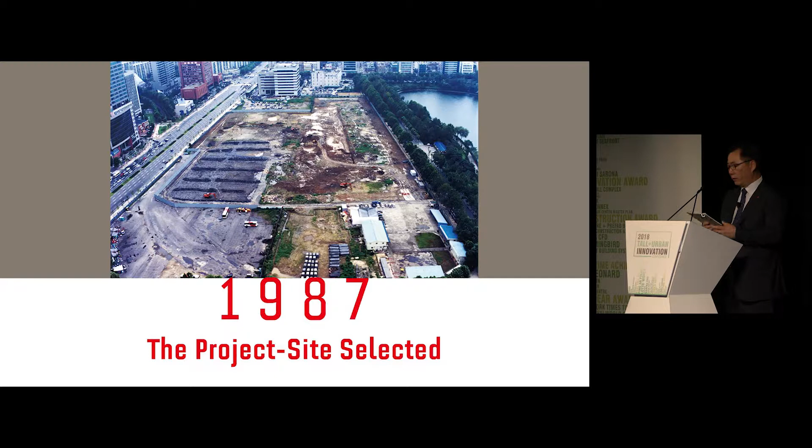We put a lot of thought and imagination into creating the complete version of Lotte Tower over a long time. 20 years after project planning, construction began in 2011 with the placement of the super large mat foundation.

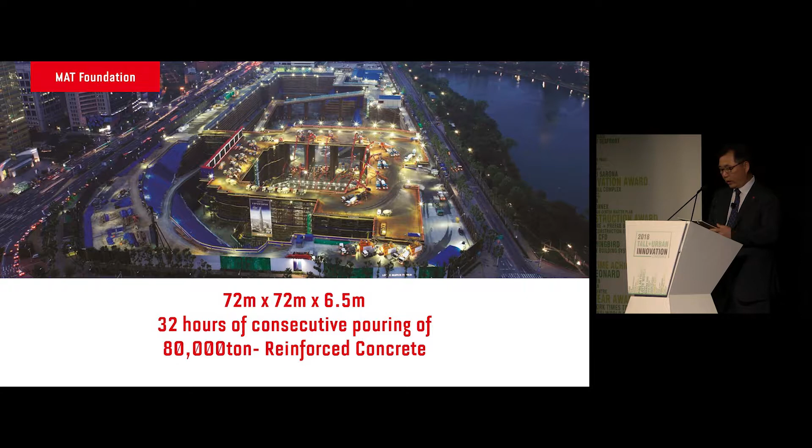As the first super tall building in Korea, there were so many obstacles that we needed to overcome. In spite of so many hardships, the completion of Lotte Tower was possible thanks to the capabilities and passion of Lotte Group.

Since the establishment of Lotte Confectionery in 1967, Lotte Group has led various fields including retail, hotel service, chemical, and construction, enriching people's lives by providing superior products and services that customers love and trust.

Lotte has also made inroads into around 30 countries in the world, including Asia and Europe, and achieved a total revenue of $90 billion last year as a result of active businesses, proving its status as Korea's Big Five.

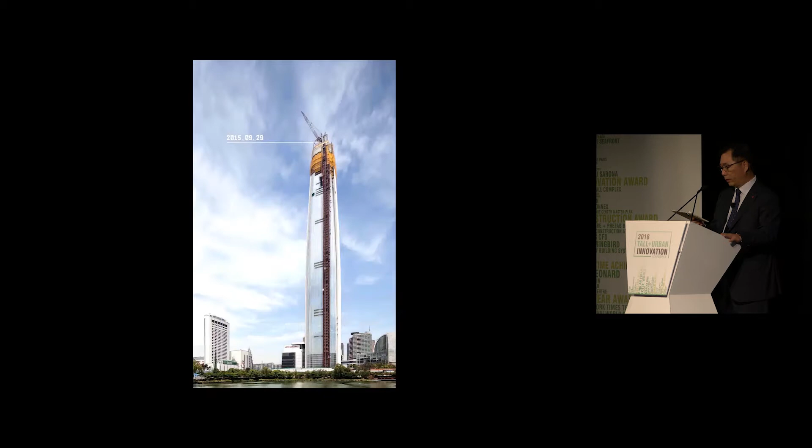Lotte Group has accumulated its core competencies and global business know-how from different business sectors over the past 50 years. The result of integrating those over 30 years is the birth of Lotte World Tower.

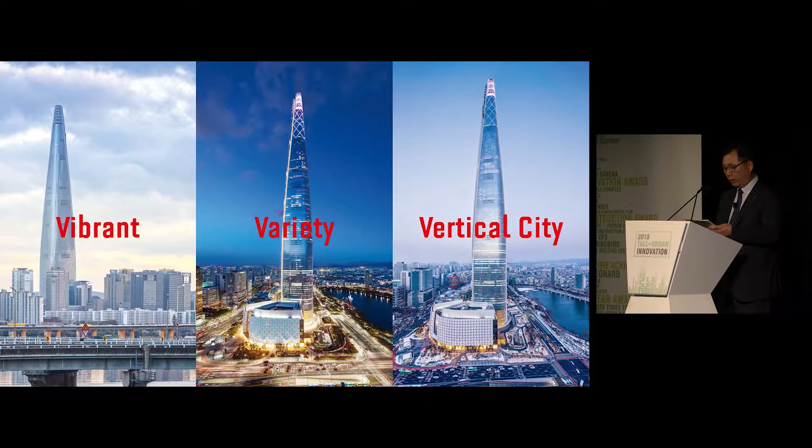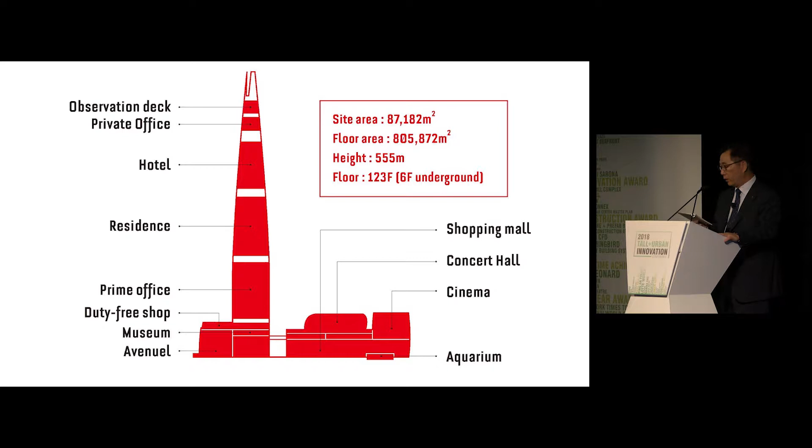I mentioned the Lotte Tower earlier as a vertical city that offers a comprehensive lifestyle. Lotte Tower is designed to perform various functions so it can give varied memories to those who experience the tower. It is a comprehensive space that offers not only shopping, but also entertainment, food and drinks, and high-quality cultural facilities all together.

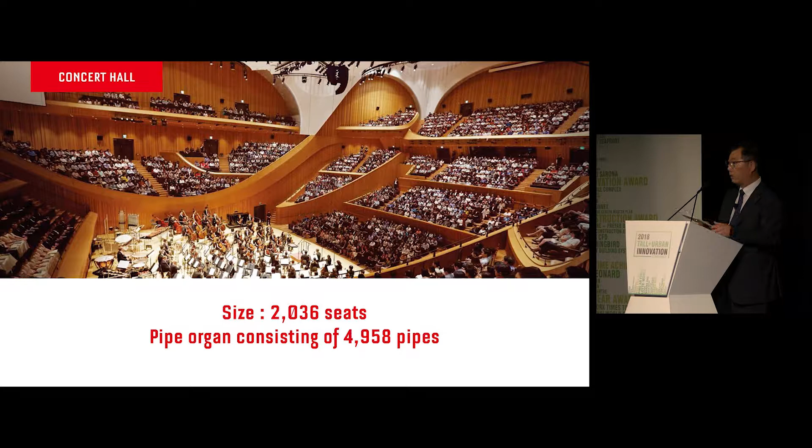The glassed floor observation deck and the double-deck elevator won 3 Guinness records with the height, travel distance, and speed. Lotte Tower's residence proposes a premium living style in the sky. It also has Signiel Seoul, a top-class hotel, Lotte Duty Free, the biggest duty-free shop representing Asia, Avenuel, the largest luxury department store in Korea, and the aquarium, the sea in a city.

One of our missions is to provide various experiences so that visitors can live with their own memories. Lotte Tower is also wide open for new product showcases of companies, or collaboration and marketing with global corporations.

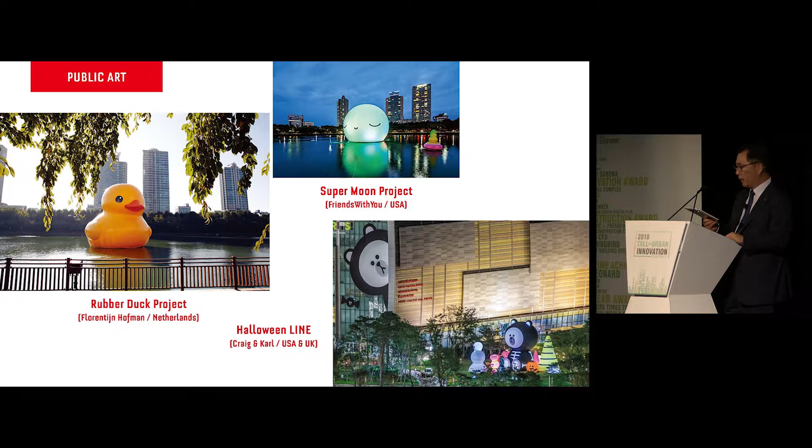Skyline by International Skylining Federation and tall climbing by world champion Jain Kim are presenting unforgettable and touching moments to people around the world. At the Lotte Tower, visitors can also easily enjoy inspirational artworks such as Possibilities and the Diver. Seokchon Lake, connected to the tower, organized various public art projects including Rubber Duck and Supermoon.

Rather than seeing the tower as just a building, we try to identify it within the relationship with the local community. As a result, we had to consider traffic and environment issues altogether. We established an underground pedestrian road that connects Lotte Tower to promote convenience for public transportation. One of the features we take pride in is the fact that the tower itself is eco-friendly.

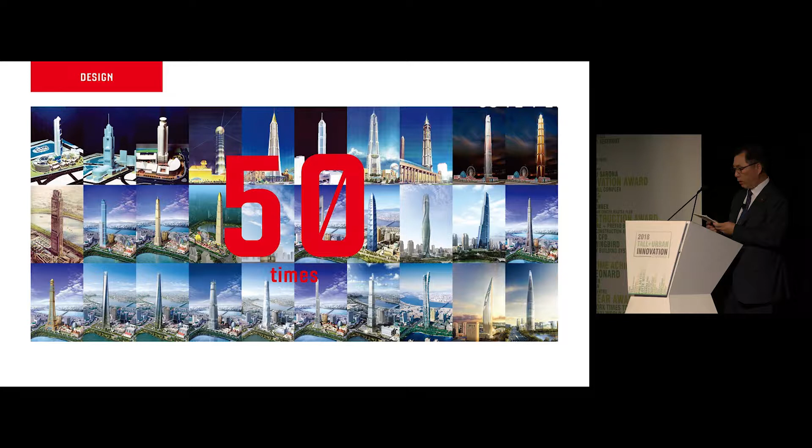Without explanation, you can imagine that Lotte Tower was created with the sweat and efforts of countless individuals. Its design concept was fine-tuned 50 times. To turn this concept into reality, 5 million people worked at high altitude quietly yet steadily, even on rainy and snowy days.

To appreciate the effort of everyone who contributed to building the tower and remember their hard work, we set up a wall of fame, engraving all workers' names at the tower's main gate plaza. Lotte Tower has now achieved 1 million cumulative visitors only 6 months after its grand opening.

As I have mentioned, we want Lotte Tower to become an open platform, both online and offline, that presents happy memories to everyone. There is a Korean saying that reads, seeing once is better than hearing 100 times. As the Lotte World Tower is now taking its first step, I'd like to invite you to the tower. We hope to communicate with the members of the council and enjoy mutual development together. Thank you.

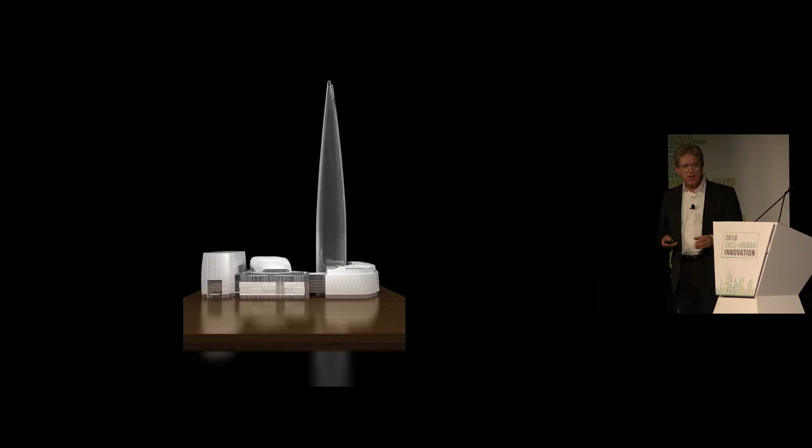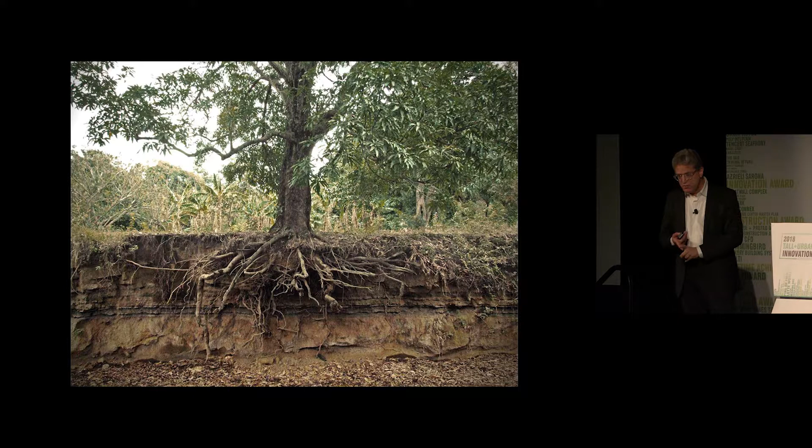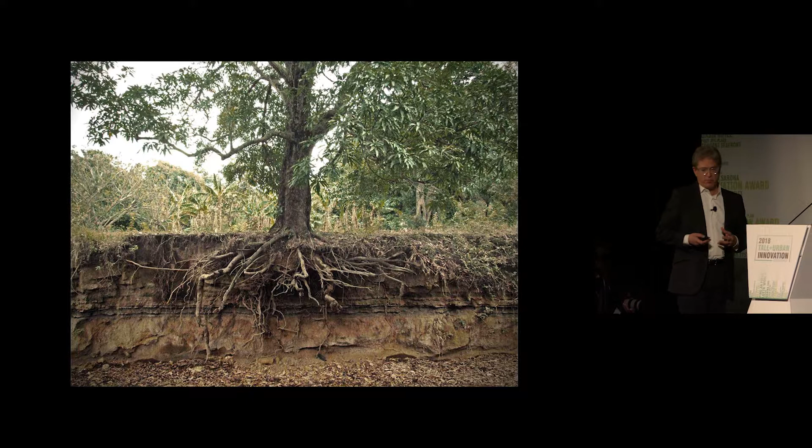But I want to talk about something broader than the height of the building, and that has to do with the multiplicity of uses, the fact that it is virtually a vertical city, and something of a city within a city. Like a tree which nourishes itself from the ground, there is connectivity to transportation systems, to a subway system, to a multimodal bus station connection, and to a strategy of urban design, which brings diverse function combinations into the upper areas, both in the base of the building and the tower. So this is not merely a matter of tower design.

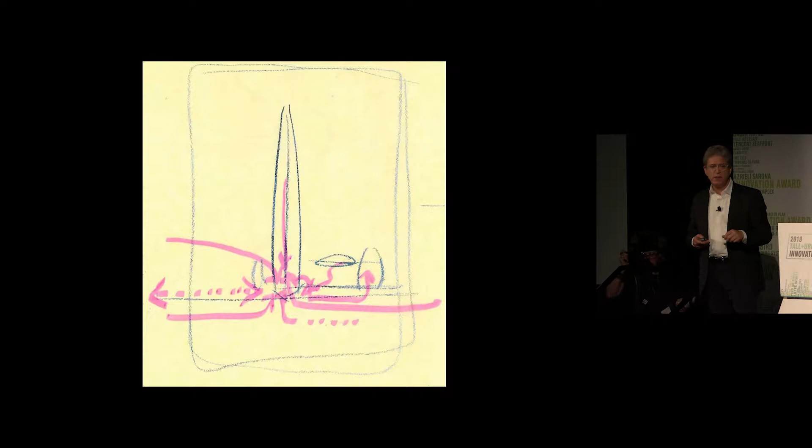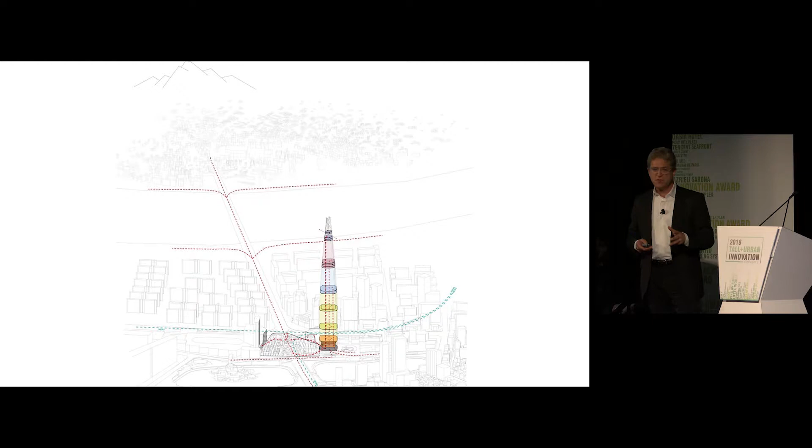The tower is about 3 million square feet, the base is another 2 million square feet, but they are all thought of together, both programmatically in terms of circulation and business sustainability, and also in terms of architectural design. So the tower itself has 7 or 8 different functions, including healthcare, retail below, but also office, residential, conferencing, hotel, and a kind of public entertainment at the top.

But that's only the tower, which you see here. The principle of the placement of the tower, and the reason for its existence, has to do with a city that is a series of sub-cities. Seoul is, as those of you who know it, vertiginously or vertically challenged, to the degree maybe only that Hong Kong and maybe Rio are.

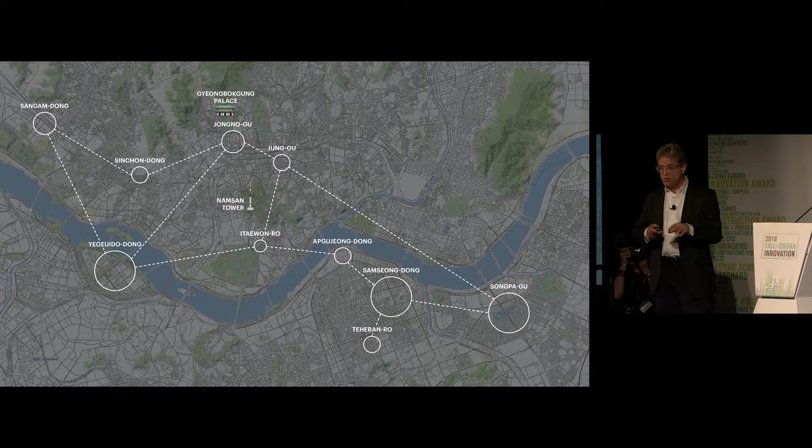So perforce, it's a series of sub-centers cradled within mountains, and this has created a series of different areas that correspond to each other by transport, but serve a little bit on their own as sub-centers. This theme of the multinodal city, which will be the theme around which the Council on Tall Buildings will gather in Dubai some months to come, is critical to this project.

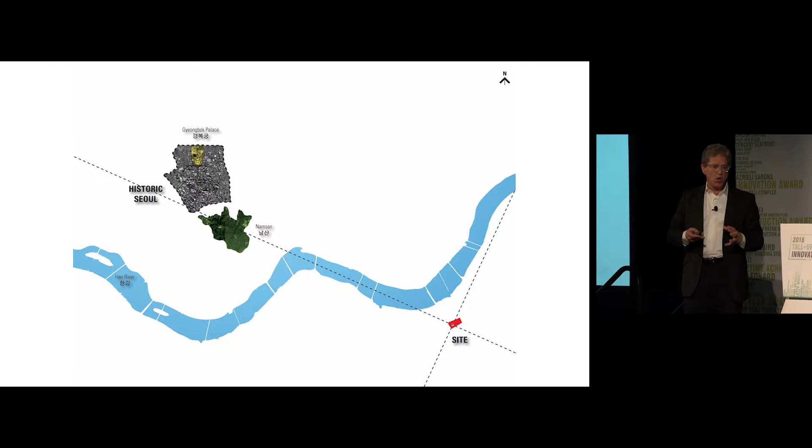So the relationship of this site, both in its density and architectural form and function, to the older center of the city—which you see here in this diagram—to Namsan, the older center tower, rather mountain zone of the city around which the palace is built. That relationship, an axial relationship, is inscribed into the building form as a kind of cleft in this tall, tapered form. It aims itself towards the Namsan Tower, towards Gyeongbok Palace.

We can see that in the site plan. You see a diagonal running through the tower, which is on the lower left.

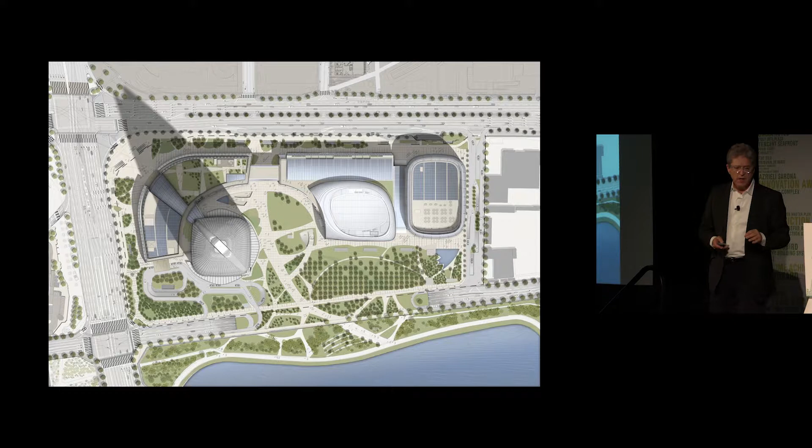Also, part of the mixed use and mixed environment aspect of this building is that it is not only a series of built forms, but there also is a park, maybe a 10-hectare park, which is public property, but its edge is part of the private property. A 7-lane road separating this site from the park has been submerged and subverted in order to create a binding and synergistic relationship between this project and the park. Here you can see the way there is this sort of balance between green, water, tower, base.

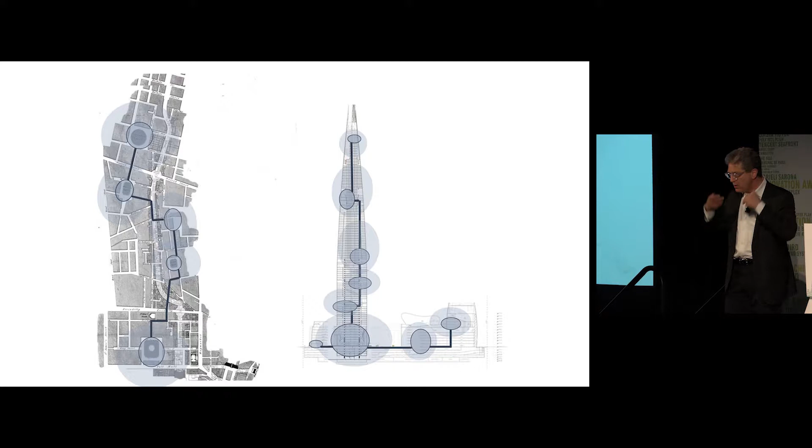It's seen in a sort of holistic way. Now, the vertical sequence of elements that march up through the building and the base could be likened, in this diagram, to its half-kilometer of urban passageway, urban sequence. Here it's compared to a series of London squares and public spaces which run along or adjacent to Regent Street. So you can make this comparison in your mind to an urban sequence in a building, an urban sequence in a city, diagrammed here in a number of different colors.

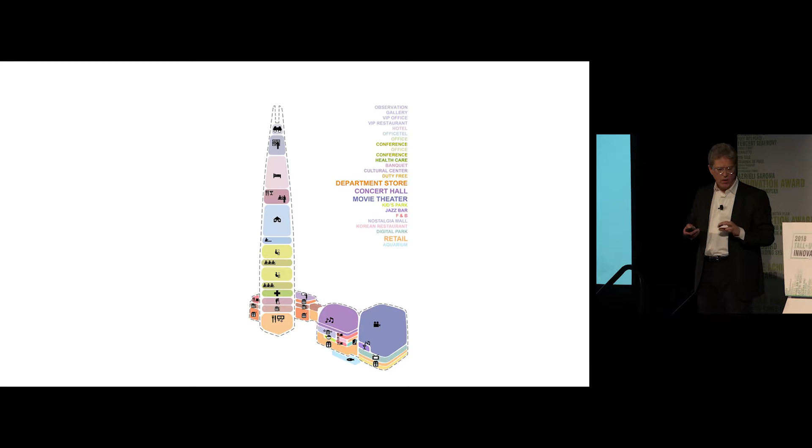And you see the way the tower and base, the sort of skyscraper and ground scraper, are working together. They are, as I said, conceived together, and the tower is in a way but another element of this composition. So the curvature of the taper of the tower, which I'll get to in a minute, and the curvature of cinemas, of restaurants, and of cultural functions, makes a kind of ensemble.

This then—very important, as we all know—the way that the public realm is celebrated or facilitated by such a large project is critical, and not often looked after. In this case, it's about the same quantum or more as the public space at the base of Rockefeller Center.

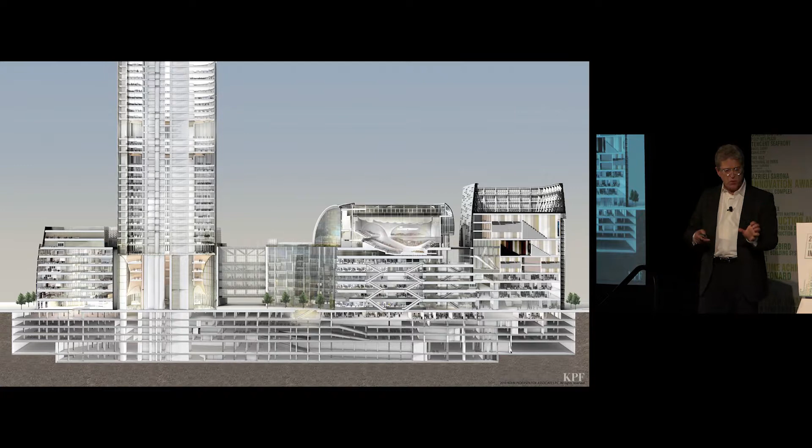It's a series of scooped, curved spaces that work their way around tower, through base. And then they work both outdoor and indoor in publicly accessible passageways up to not only the tower, but to the platform top of this base, where, if you could see on the center right side, is part of the section which is a concert hall for 2,000 people.

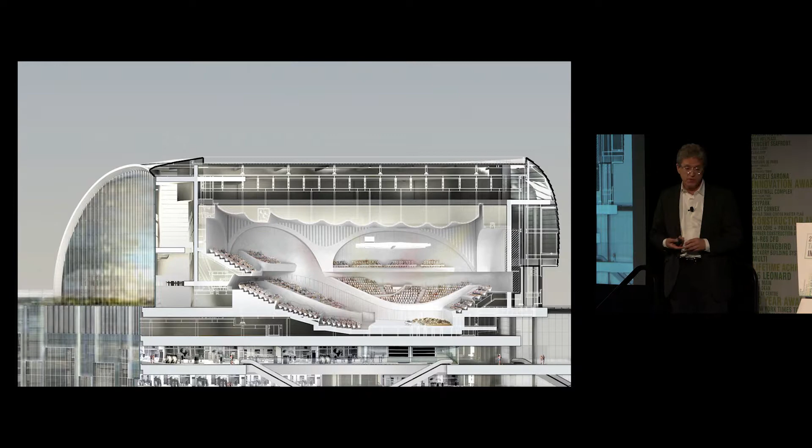This has the highest acoustical value or performance of any concert hall or public venue in Asia, with the exception of Suntory Hall in Tokyo. That's very significant. You see here a view of this building, sort of building on top of a building, part of this high-rise structure, on the 8th floor, where pre and post function one can spill out.

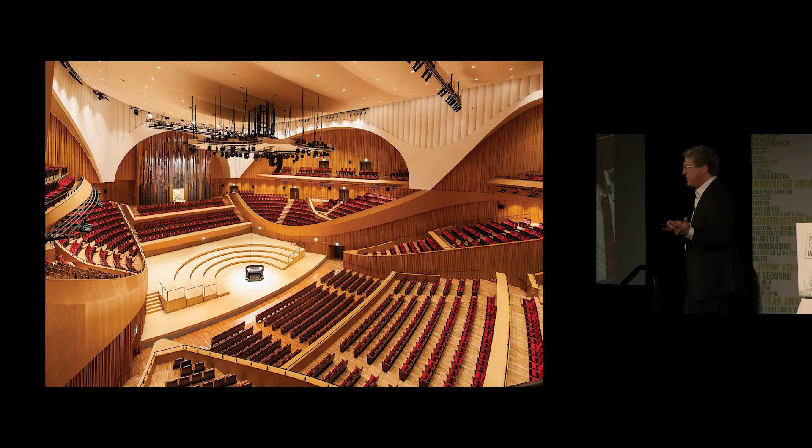And then inside—this is before performance, so you don't see the 2,000 people—but this is part of this composition of this high-rise structure. And so that's already in operation, home to the Seoul Symphony Orchestra.

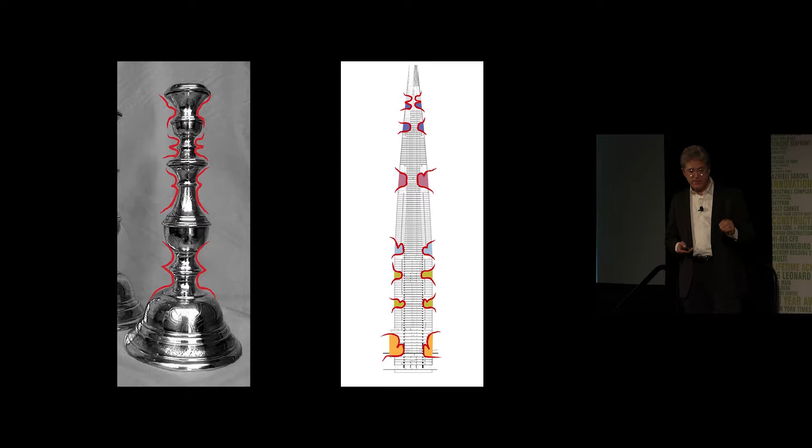That idea of curvature was brought not only to the outside of the building, but to a series of sectional maneuvers which made public and semi-public spaces that move their way up the tower. Here you see at the base of the building the two-story lobby, which works with the double-deck elevator system for the main functions, including shuttle elevators that give this scooped, lathed profile to the inside of the building.

I won't go through all the functions—Mr. Park has shown some of those in passing. But when it gets to the top of the building, it culminates in a 6-story sequence, a suite of public observation and entertainment functions. So this is very much about public access.

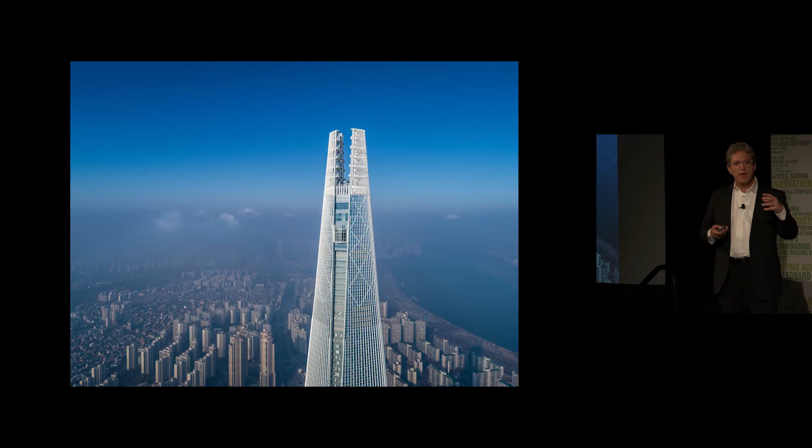I think the principle we're aware of and all practice, whether in London, Sydney, Hong Kong, Shanghai, or here in Seoul, is that at the top of such a structure, as it attains this kind of public importance and becomes a symbol for the city or nation, it should be more than a private function—it should be a publicly accessible and almost visually transparent set of uses.

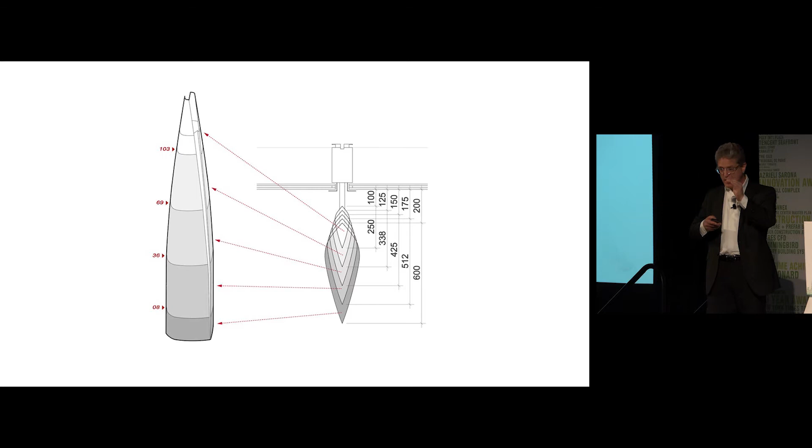The tapering of the building, which you see here with the clouds passing by as we look up, this unusual form which moves from more of a square below to a circle at the top, is articulated in its facade with a series of mullions and fins which graduate in their girth or dimension 5 times as we move up the building. So, almost like a natural figure—the bone in a bird's wing, or the vein in a leaf—there is a supple graduation of form to match dimension, height, and place within the building. You can see this here for a piece of the tower at the mid-level, the way these vertical shades are posted out from the building.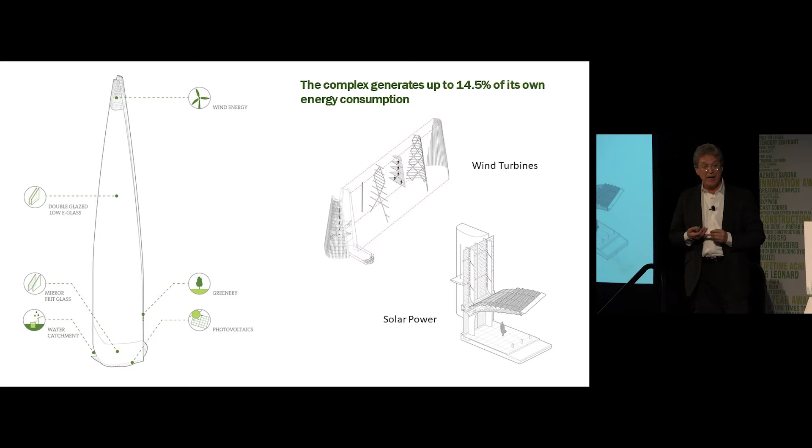The environmental function of the building is very important because it's such a signal tower in Seoul, as Mr. Park mentioned. Up to 14.5% of the energy used in the building is generated by wind power, photovoltaic, and also by heat exchange over 10 miles of geothermal piping underground—it's a huge site—and temperature exchange with the water in the Han River.

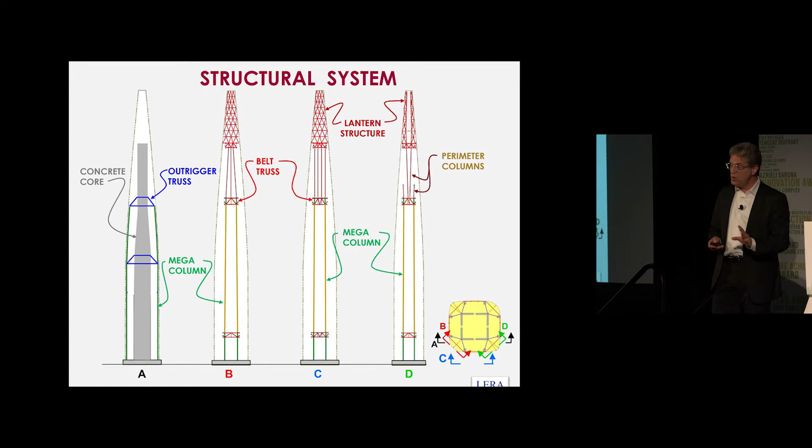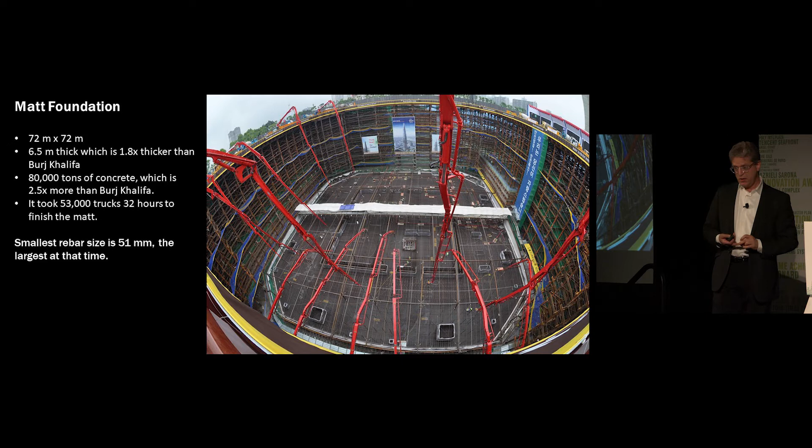I won't go into the structure much except to say it is an 8-column mega-column system, but these columns are sloping in 2 curved dimensions—quite unusual. Nothing comes down to the ground straight. They're supported by a 6.5-meter deep mat, 1.8 times deeper than the mat of the Burj Khalifa, and one that engaged a pour lining up 53,000 trucks over a 1.5-2 day period to pour this extensive mat.

All of that allowed for this unusual structure from a culture of construction companies, broadly speaking, which was responsible for building the Burj Khalifa, the Taipei 101, the Petronas Towers, but now Korea expressing its own kind of national destiny in making this building.